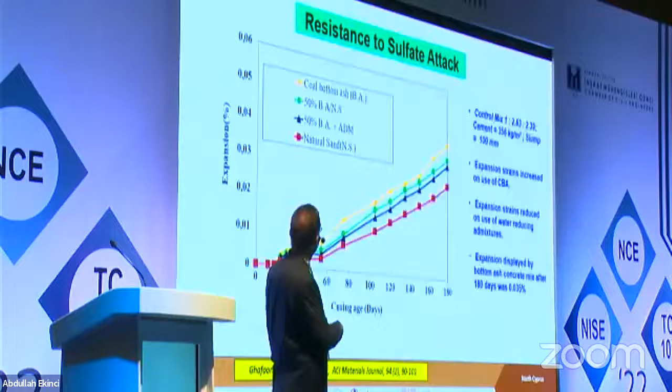We have three types of solid waste: solid waste from home and office, industrial solid waste, and waste from mines, agriculture, and industry. For the people in academics working on solid waste management, they can publish in Construction and Building Materials, Waste Management, and Resources, Conservation and Recycling.

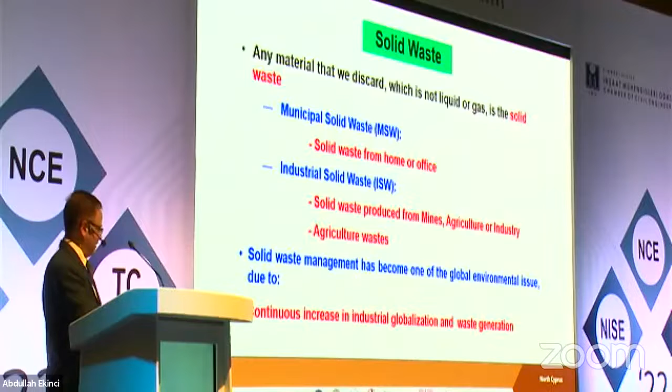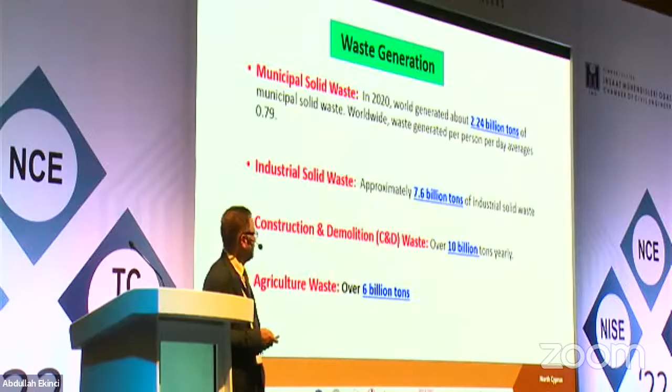Look at the waste generation. In 2020, for example, 2.24 billion tons total, out of which industrial solid waste is about 7.6 billion tons, C&D over 10 billion tons. Even these figures are not really accurate, because some countries really do not know how much C&D waste they have. And agriculture waste over 6 billion tons. So, to summarize, what are the major industrial solid waste byproducts? I'm going to focus on some of them. We have thermal power plants, coal ash, coal bottom ash, etc.

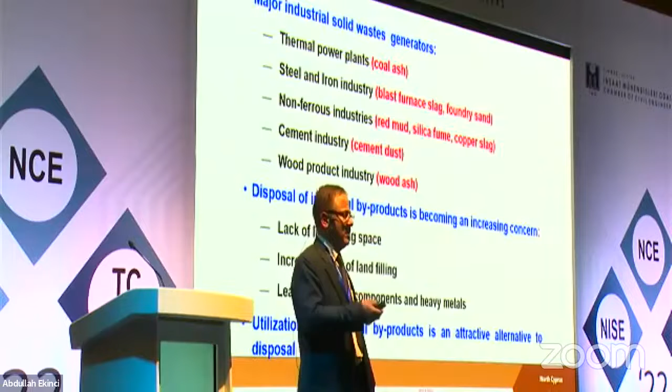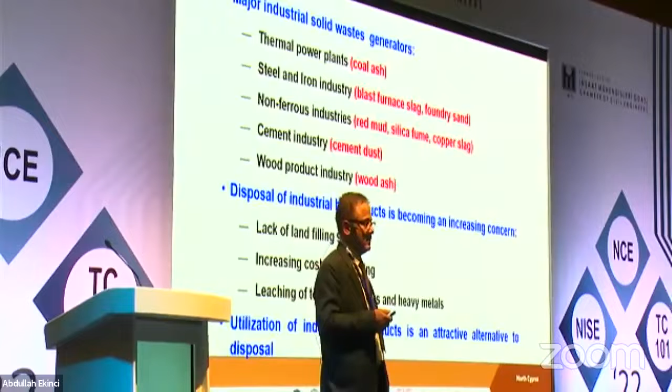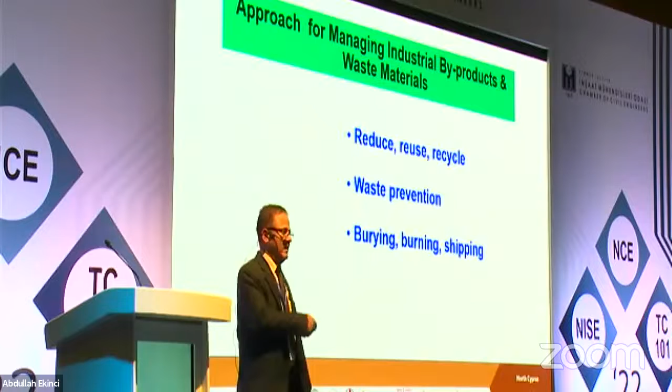So first of all, we want to reduce. We use a lot of plastic bottles, waste glass. So reduce, reuse, recycle; that is the number one best option. Second, waste prevention. And third, burying, burning, and shipping. You must have heard the news: some of this waste from Australia comes and is dumped at the ports of China and India.

Okay. So, the problem is, these are some of the listing of the byproducts you have. I'm not going to speak it. Out of this, some have established research. You know what are the final conclusions. For some, the research is still going on, and for some, the research is still to take place to reach solid conclusions. For example, waste glass. For example, I'm going to cover some of them.

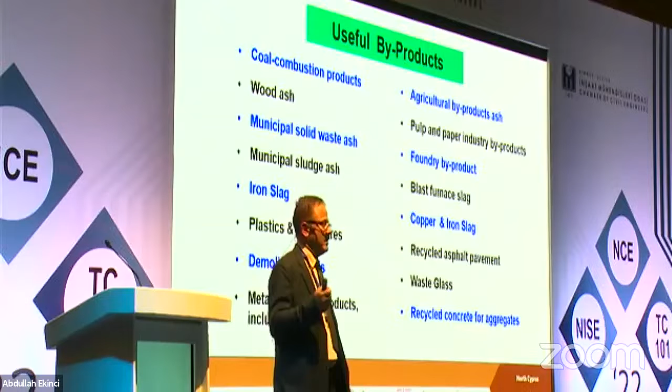The problem which bothers a full-scale utilization of waste glass is its ASR, alkali silica reaction. Once we are able to fully solve it, this is going to be a wonderful material, either a cement replacement or a sand replacement, etc. So out of these, I'm going to cover 2-3 to give you some of the scientific results, and then send a message. What is going to be there?

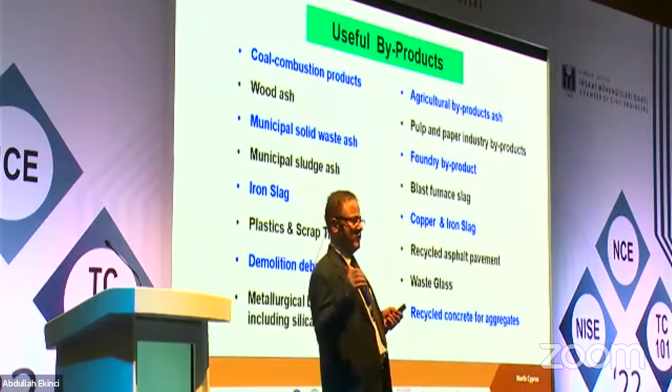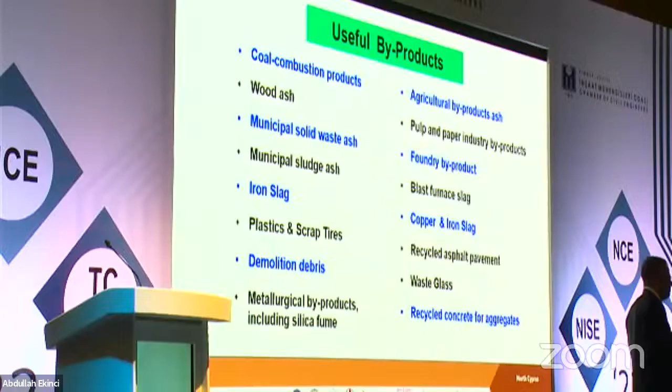And before I do, most of the byproducts I am going to cover are going as a replacement of fine aggregate. My research is spread all over use of any materials as a replacement of cement, fine aggregate, but for the last 10-15 years, the major focus has been on the utilization of byproducts as a sand replacement. The reason why, my argument is, we can produce cement, but we cannot generate or produce fine aggregates.

And most of these industrial byproducts, some of them are listed, can be very effectively used as a fine aggregate replacement. So I'm going to cover 3 here. One is going to be coal bottom ash, the other is going to be foundry sand, and the third is going to be waste glass. And maybe all of you are aware of the research, but I want to give you some idea about what I'm going to talk about.

Say you made a control concrete or the reference concrete, say 50 megapascal, for example. Then we made certain replacement, foundry sand, coal bottom ash, etc. And the value of the compressive strength has come down to say 25 megapascal. We as civil engineers, I do not know the mindset of the people in North Cyprus, but generally, compressive strength is one of the most important properties from which we define the concrete. So people say the strength has decreased by 30%, 40% or increased by this much percentage. So we always talk in terms of percentage.

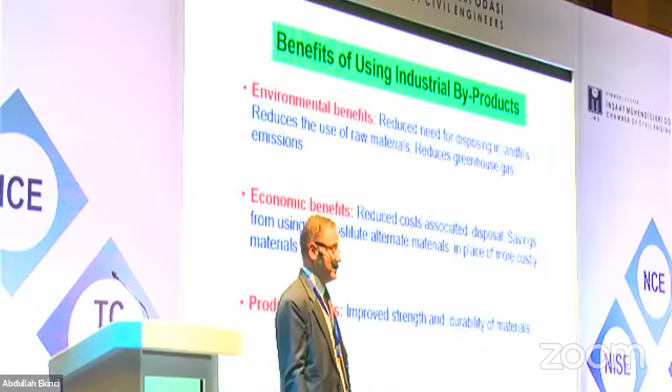So, how do I do? There was an economist, Adam Smith, he said, every process is immortal. It never loses its entirety. And in this kind of research, we are also talking of a kind of circular economy. Even if you have thrown the glass bottle, it's again going to be used. So these are 3-4 benefits. Environmental benefits you have if you use these byproducts, economic benefit, and the product benefit. Economic benefit, you save the cost of fine aggregate or cement depending upon what you use.

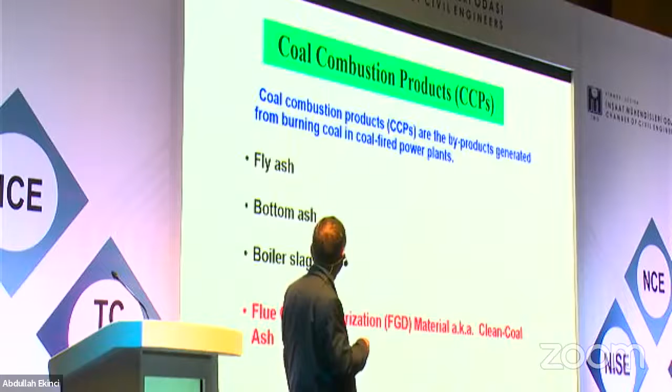So these three I am going to cover, and if the chairman gives me a few more extra minutes, I will be grateful. This is coal combustion, we have three: fly ash, bottom ash, and boiler slag. I am not going to talk about fly ash because every literature is there, maybe thousands of papers. I am going to talk about coal bottom ash.

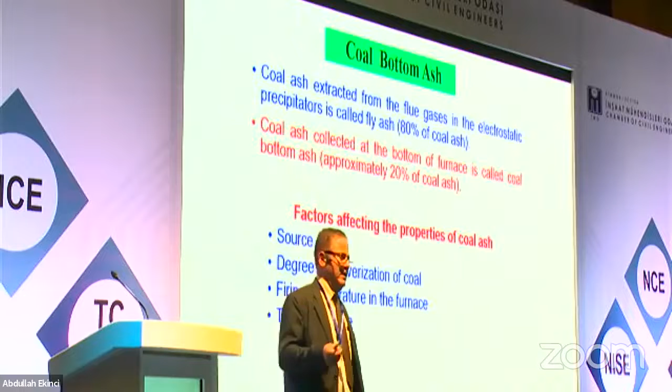By 2030, it is going to be 600 million tons only produced in India, fly ash. If you assume 20%, I'm talking from Indian perspective, and then you can go for a global perspective. Coal bottom ash is generally around 15 to 20%. So 120 million tons of this is going to be used.

So it's difficult to use in concrete. So you need to design a concrete mix. We have two options basically. The point which I want to convey a message as such.

If you simply say it's difficult to use in concrete, so run away from here, let it lie like this, let it spoil the environment, spoil the land, water table, etc. Or work hard to find out its solutions. This is my approach for any of the byproducts. It may be harder, but the time has come, we all must focus on finding out, from the civil engineering point of view, the possible uses. We cannot use all, but we can certainly, and I will show you some results to justify it.

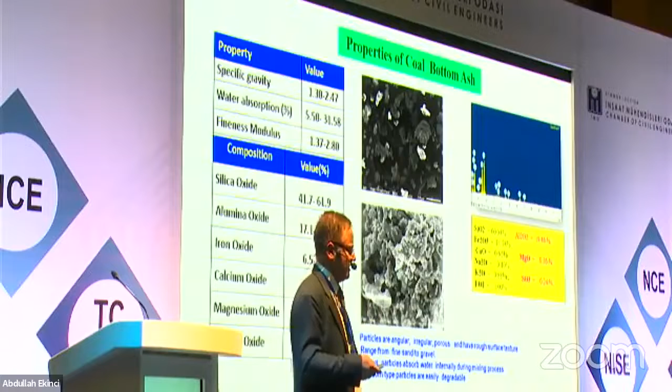I'll come directly to this table you have, like water absorption, calcium oxide values are very erratic because it depends whether you're talking of class C fly ash or class F source, a lot of variations. The particle sizes are crystalline in nature, they are porous, so many people do not try to use it. We started this research almost 8-9 years back, through one of the PhD students.

So these are the irregular particles, so your workability also gets affected. People don't want to touch it as such. But my thing is, any material, you must find out the solution. May not be a structural concrete, maybe a lean concrete or a low-grade concrete.

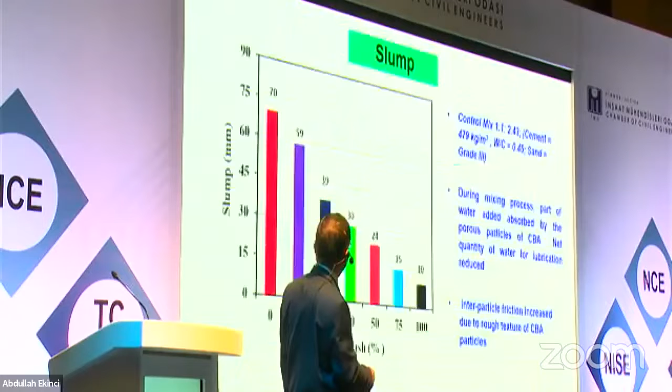Okay, let me come to this. Say, for example, this slump. I told my student, replace all up to 100% finally. Let us see what happens. It's an unknown territory, and this is what is to be done for any material to be used.

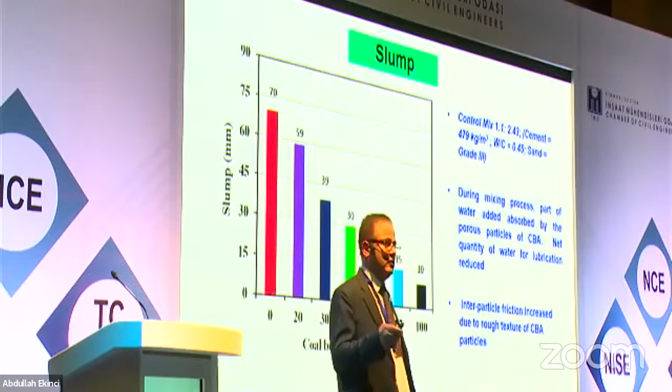Look, see, the slump goes down, you know. So remember this slide. When we talk of concrete research, we should not judge the suitability of concrete only by one of the properties. One of the properties means fresh properties, strength properties, and durability properties. We need to take into account in totality all three parameters.

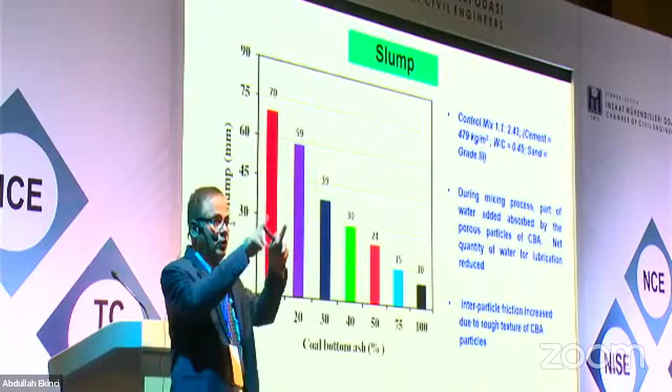Because I'm going to show you a slide of compressive strength. If you only look at the compressive strength, this is Siddique. Okay, this is another, he's a professor in England, some of you must be knowing, very famous researcher. Here you'll find very contrasting research results in coal bottom ash, because the particle is porous, crystalline, hollow, so it depends what type of particle size you have used. But generally the workability is going to decrease.

This is a result I am purposely showing you, that you may also get some type of other results. So generally workability is going to decrease.

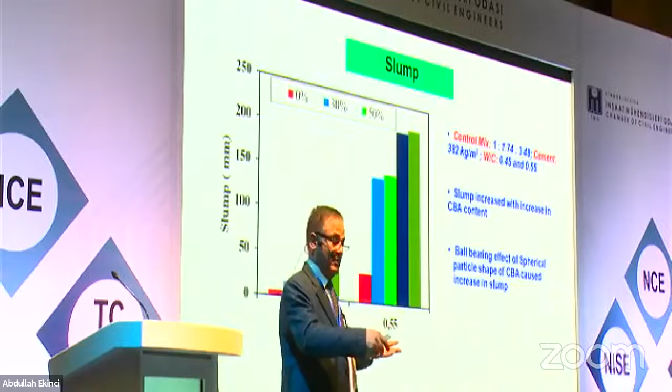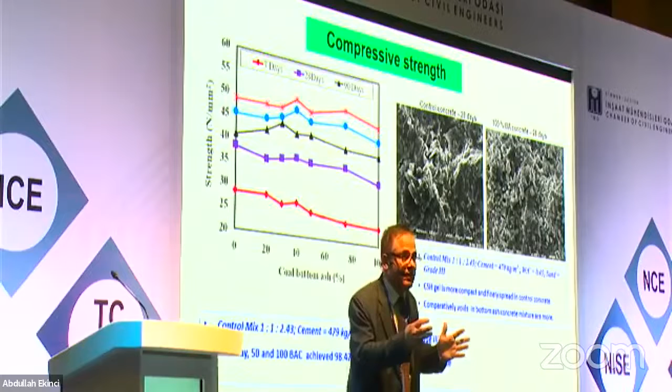But for a structural concrete, you also need to have workability. Please remember, you also need to have workability. This is the point I am trying to highlight. You need to see three properties together. If you only look at this, it is misleading. You need to see what slump, which percentage gives you a workable slump, and you're looking for a structural concrete to pick up that percentage.

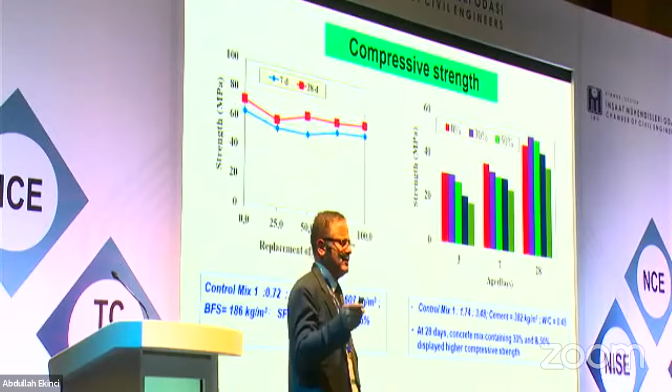Similarly, some of the various other people are trying to find out, and you will see the compressive strength is more or less the same because you're using superplasticizer for compaction, so you're getting the compressive strength. Look at this, almost similar things. This huge number of papers are just trying to put forward a message or idea.

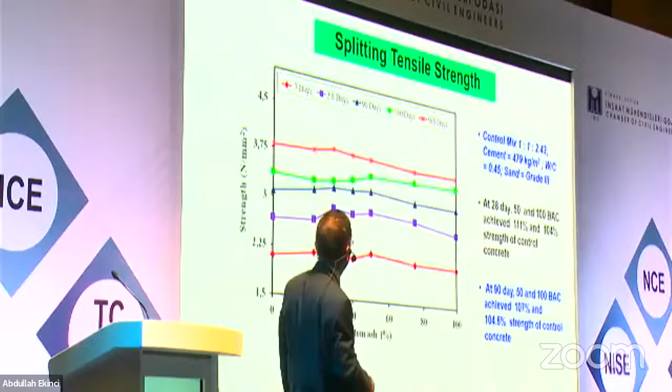Similarly, split tensile strength, one slide I put it. The first author is one of my PhD students, and similarly flexural strength shows almost the same trend, not much of a decrease. I'm coming to the permeability test.

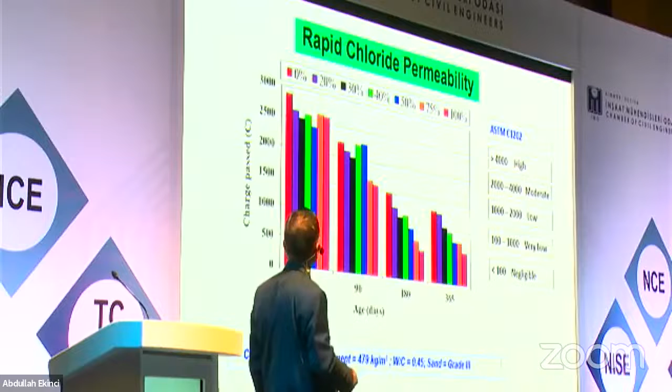When we try to use these byproducts in concrete, my point is, even if it doesn't increase any of the parameters, and just keeps the concrete at the same level, or even if there's a little bit of 5% decrease, still I will have to use it.

Because of the kind of money you save as a cost of price of cement and price of fine aggregate. Second, the amount of money you save in landfilling costs. And more important, there is no measurement of the amount of money you save from saving the environment.

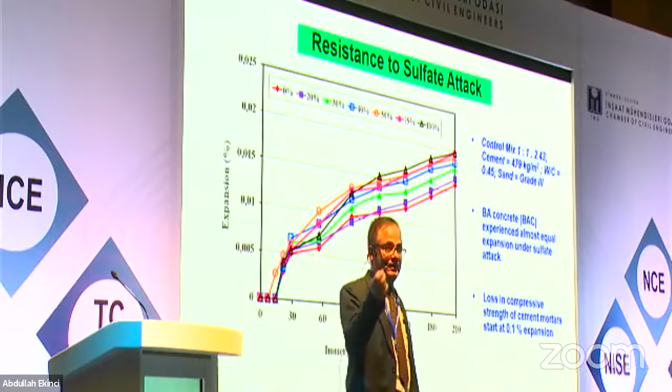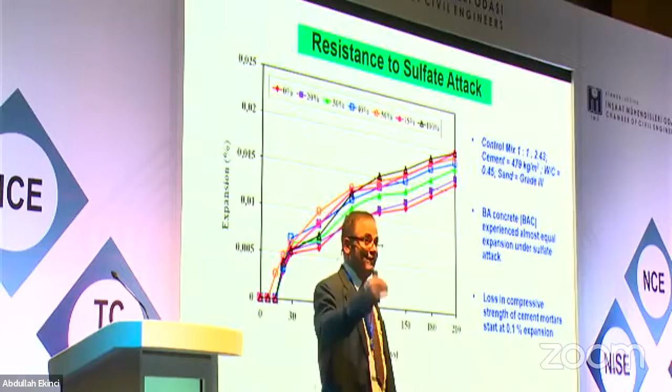So even so, most of these byproducts do improve the durability, they do improve the compressive strength. So that is a win-win situation. This is a very common question anywhere: what happens if it reduces by 10% or keeps the same level? Even then, we must use it because you are saving on cost otherwise. So these are some of the things.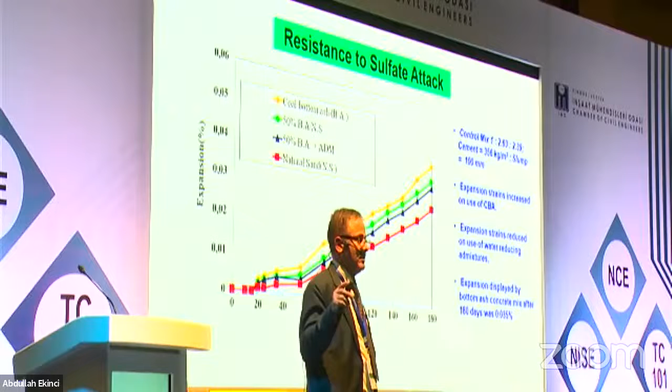He was the first person who published a paper on coal bottom ash, but seeing the issues with workability, he left the research. Then I said we started it so that we need to find out solutions.

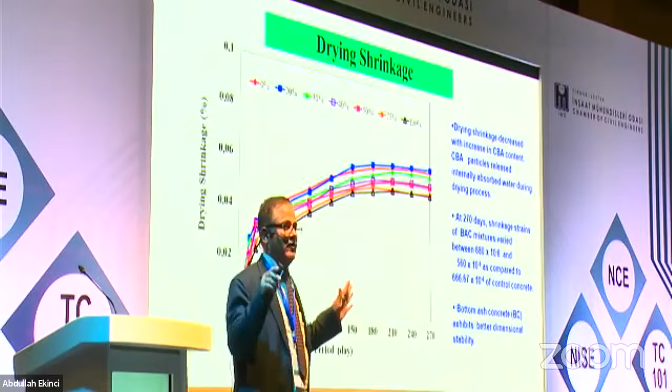See, dry shrinkage, all within the ASTM range, ASTM parameters. So none of the properties are getting adversely affected. That's the point of the message.

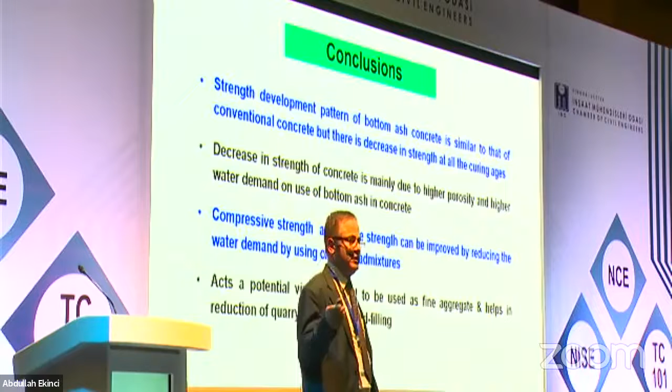And good durability. But if you're looking for a higher percentage use, which you can use in paving blocks, paving stones, or hollow blocks, we can go for a larger replacement as we do not need very good workable concrete.

Second is this, the waste foundry sand. This is a research we started globally in my school, and after that you'll find a number of papers floating around. And then I gave these two names, which are very popular elsewhere: the spent foundry sand and the waste foundry sand. What is this waste foundry sand basically?

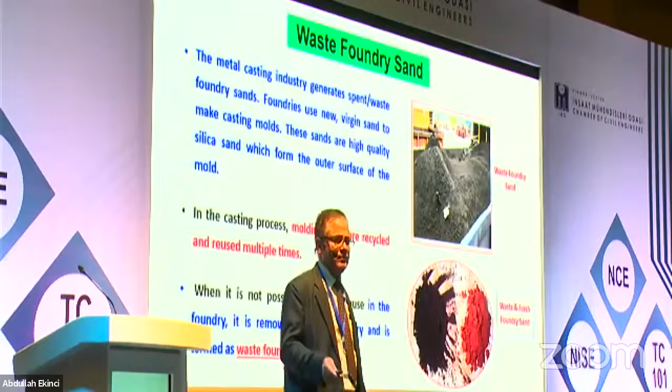This metal casting industry, I'm sure there must be many in North Cyprus and Turkey also. It is made of silica sand, and the molds are made of silica sand, then you add certain chemicals to make the mold. And then the molds are heated up to a high temperature.

And once it is heated many times to make the molds, the sand loses its cohesiveness. And once it loses its cohesiveness, it becomes useless for the industry and they throw it out. And once they throw it out, I first used the name waste foundry sand.

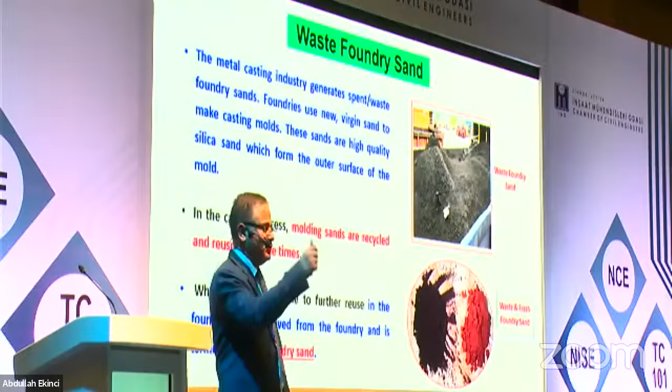But then I started hating the word waste. Something which you are using, you should not call it a waste. So I gave it the other name, spent foundry sand - sand which has already exhausted its utility in the foundry. So these are the two names we gave it.

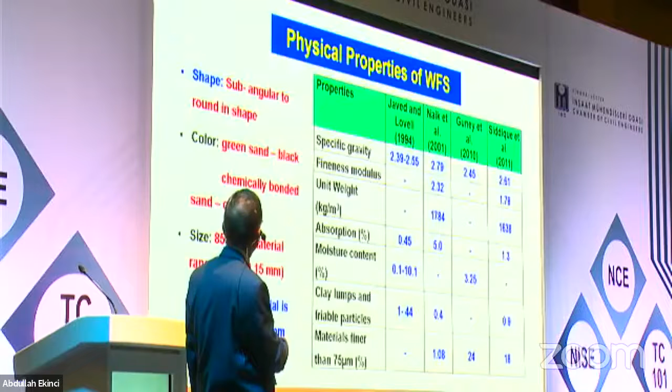Look at the physical properties, they are sub-angular. So when we started this, we found the properties are similar to fine aggregates.

Sand, natural sand is a huge issue in India. I do not know what is the issue in Turkey or other parts of Europe, but that is a big challenge. As I said, cement you can manufacture, sand you cannot manufacture. So look at this part.

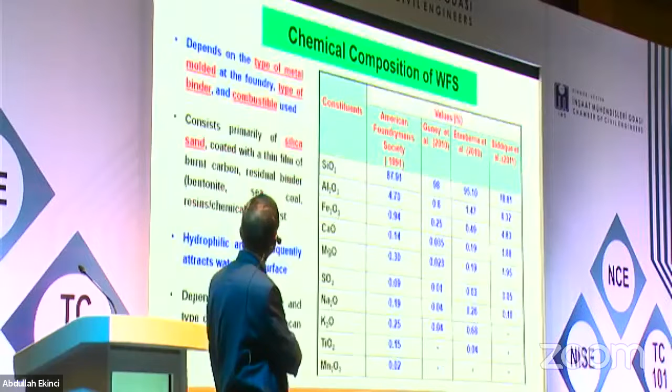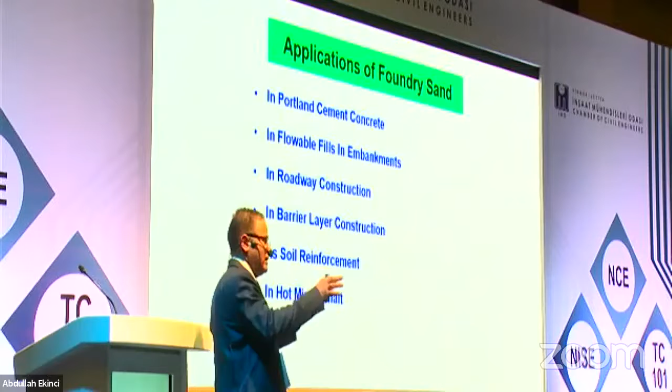These are the chemical composition, very rich in silica. And these are the likely applications. If you put in Google, foundry sand, you will find lakhs of articles on use of foundry sand in CLSM. People in geotechnical engineering may know it. It's called controlled low strength material, which is also called flowable fill.

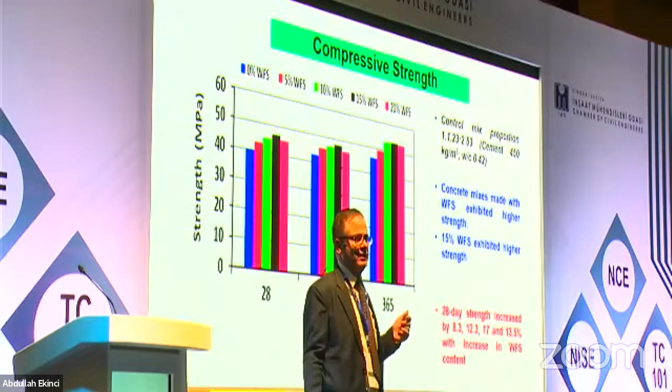Even at 20% it is more than the control. And since the particles are fine, they behave like particle packing behavior. So that is the reason you get these results.

After my research was published, a very good friend of mine, who was professor in Wolverhampton, UK, Jamal Khatib - I think these days he lives in Lebanon - called me and said, I want to replace up to 100%. I said, well, go ahead. Look at this, it's Khatib 2013-14, we worked simultaneously. Look at this graph.

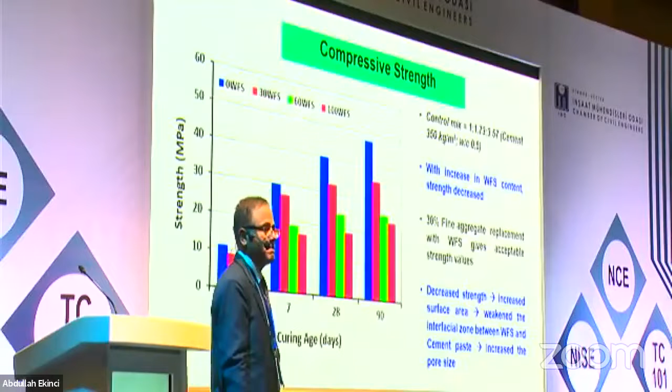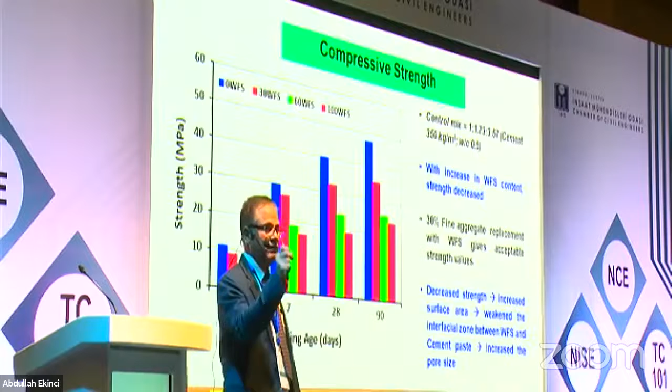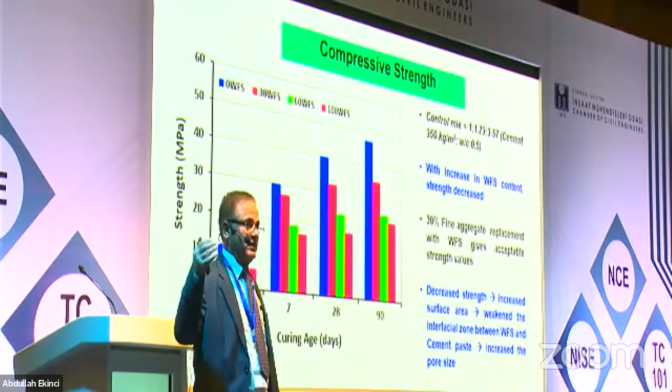Our purpose, at least my purpose, is to find solutions to use in construction materials so that we do not have issues like landfilling etc. Because concrete doesn't mean only structural concrete - concrete means right from 10 megapascals to 200 megapascals. So depending upon things, we try to find out.

See, similarly, I think he is an author from Turkey, I don't know which university. Look at almost the same thing - similar.

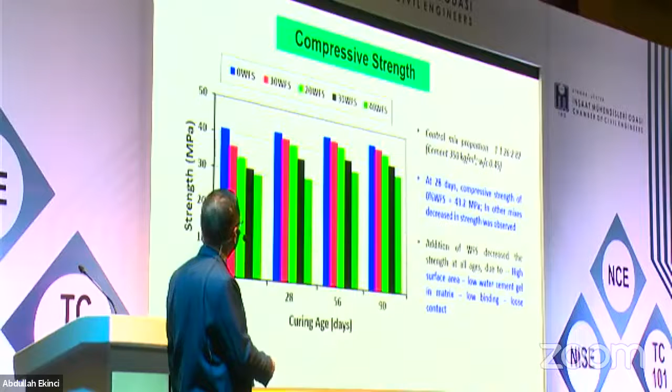Because only with the compressive strength you cannot judge if concrete is good or bad. You need to see the durability. That is very, very important.

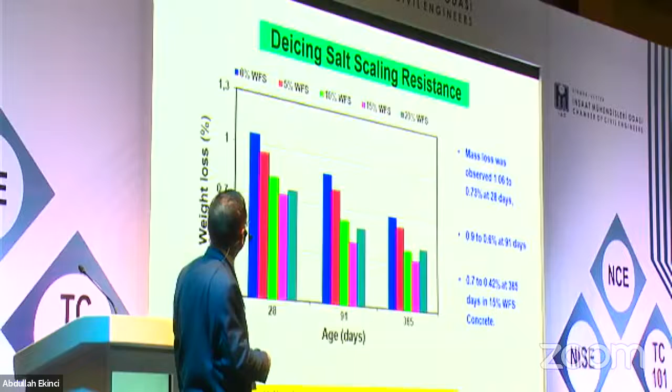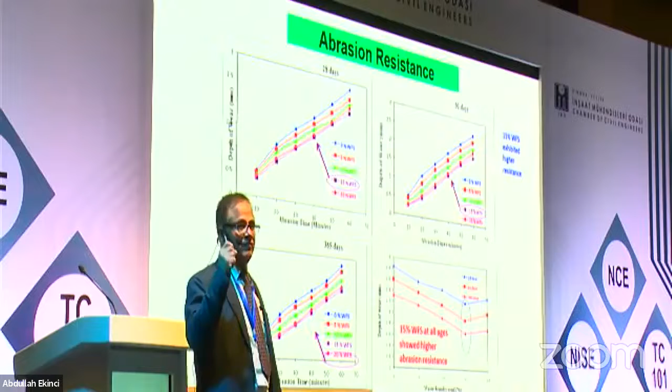Abrasion resistance at like 15-20%. We can see this is also produced in huge quantity globally on this side. And this I can tell with more authority and confidence - this is a better material than coal bottom ash for use in concrete, because this is not a hollow material, this is a solid material, and very similar to your natural sand or river sand.

What do you call it in North Cyprus? River sand, natural sand, or fine aggregate, whatever you call it.

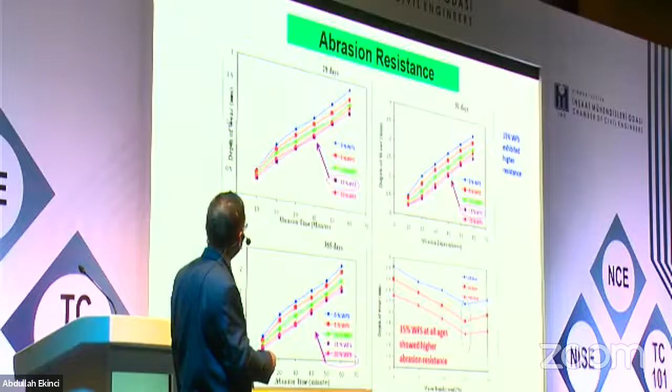I have not included this, but I will give you an idea - those who may be interested can contact me. After this, when you start a discussion, at some point of time you come to a stage where you just don't believe in only publishing.

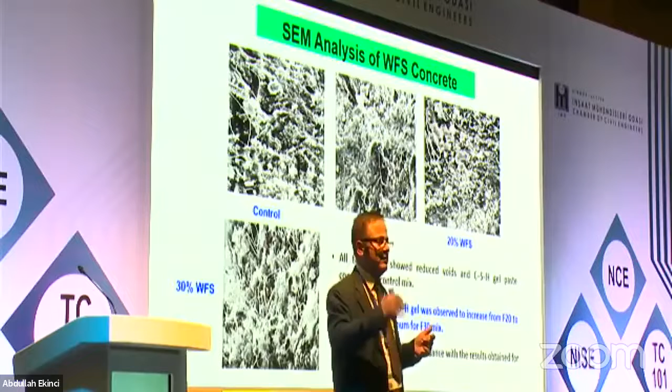If you talk in Europe, particularly Germany and the US - I'm not sure about Turkey or Cyprus - whenever you want to justify to their agencies in Germany or France, they want to find out the leachate analysis, how it is going to affect the soil, if you're using, say, MSW, foundry sand, coal ash or any such material. So they want to do the leachate analysis.

We have done it, not included in this part, in association with a professor in microbiology at my school. We have done treated foundry sand with microbes, fungus, bacteria to improve the leachate quality. As such, this material is not dangerous - you do not need to do those researches.

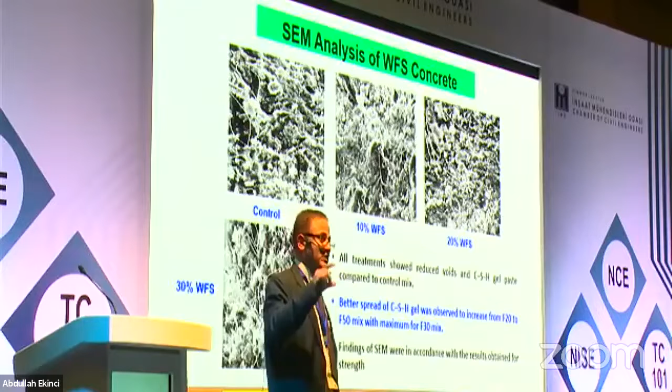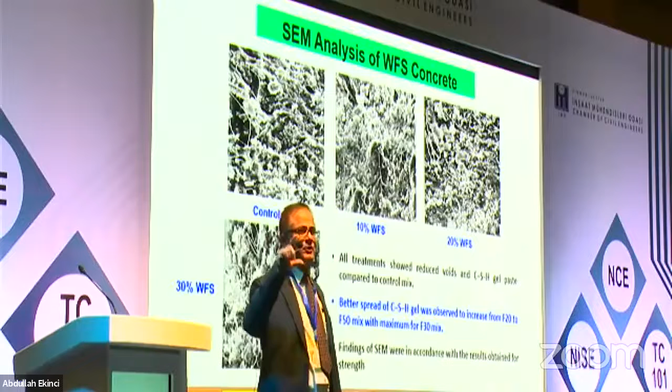It's a very, very safe material as such. But if you go for the use of hospital waste, for example, or municipal solid waste, if you really want to publish papers in good journals, you must include these tests. Otherwise, everybody does fresh properties, everybody does strength properties, everybody does durability properties. So what is new in your research? If you do this leachate part, your publication will have a better value.

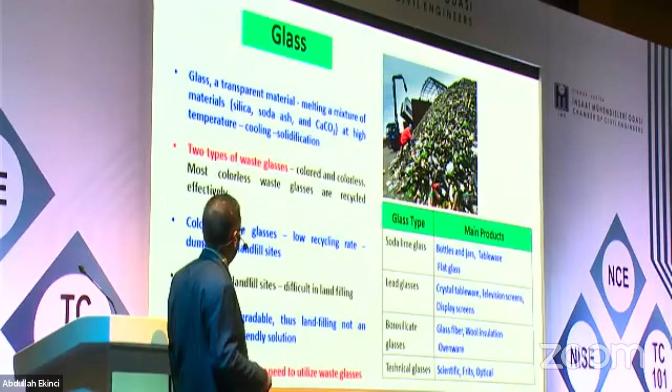So similar to the conclusions here, easily you can use 15 to 30% in structural concrete. If you want to use higher than that, the Jamal Khatib reference is more than enough. Now coming to this waste glass, again you know how much is generated. Just have a look at this. Different types of glasses you have, and this quantity is increasing exponentially every year.

And we simply cannot say we have an ASR problem. The ASR problem is solved to a large extent with the use of metakaolin and silica fume, etc. But look at the quantity. Worldwide is how much? 130 million metric tons. Like India, that much, whatever data I could get. But this is huge. Look at that.

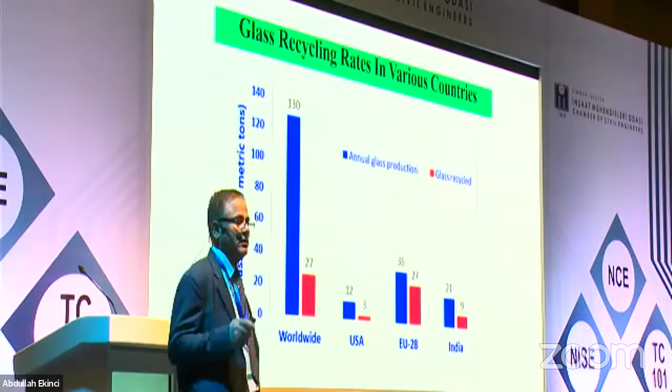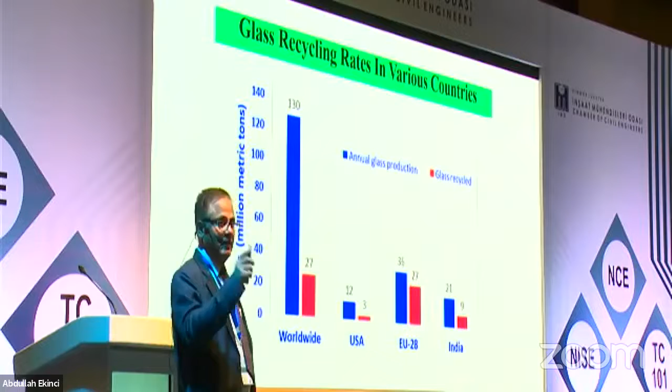Recycling, nothing. We have to find its usage, and this can be a wonderful material, I'm telling you, for cement replacement and as a fine aggregate replacement. But with a caution: you need to be careful in grinding to the proper size. If it is irregular size, instead of helping, you may not achieve good strength for a structural concrete. Otherwise, for lower grade concrete, there is no problem.

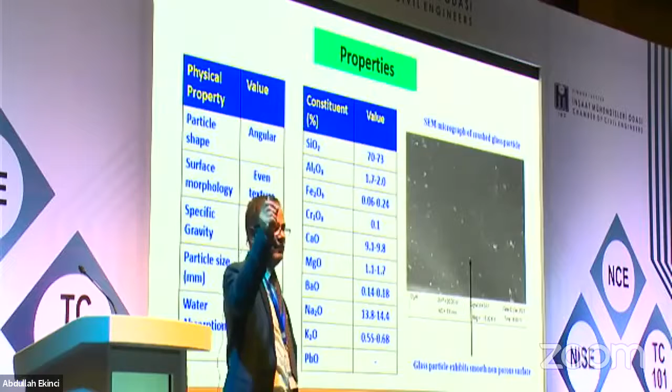So this is its particle shape and particle size, for the benefit of the audience. It is high in silica, but it has calcium oxide, silicon oxide, ferric oxide. To be very honest, once the ASR problem is fully solved, it could be a wonderful material to be used along with silica fume and fly ash for high performance concrete, because it has a decent amount of calcium oxide, aluminum oxide, etc.

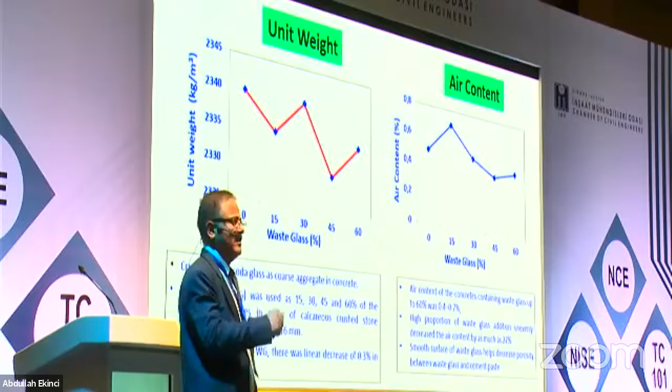So these are uses of waste glass. And look at how, I think the first author is from Turkey, how the unit weight varies, and air content. There's a very marginal change in the air content, if you look at the axis rating. But again, don't take it as the Bible, that this is the only research available for the unit weight. There's a lot, but it gives you an idea of how to go about it.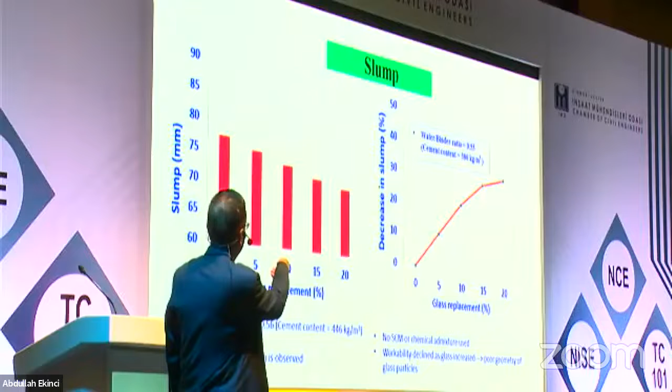Slump, look at the slump, not a problem. At 20% replacement, a decrease, but not a substantial decrease. To be very frank, I'm not concerned if a property decreases, as a civil engineer working on concrete materials. I will use it in another type of concrete. The objective is to find out its usage basically.

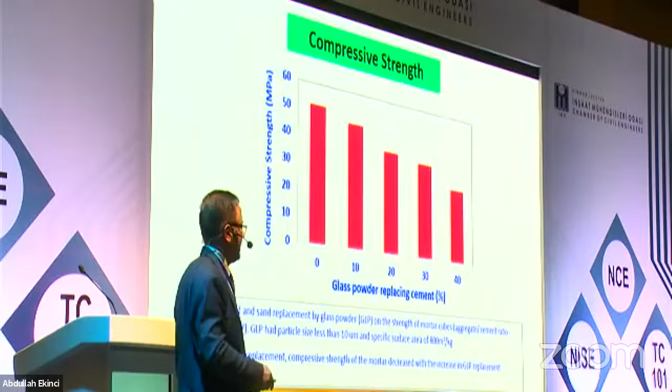But again, this research alone can be misleading. You need to see durability properties, particularly ASR, along with the workability. But look at this. Similarly, split tensile strength results are more or less similar. And then flexural.

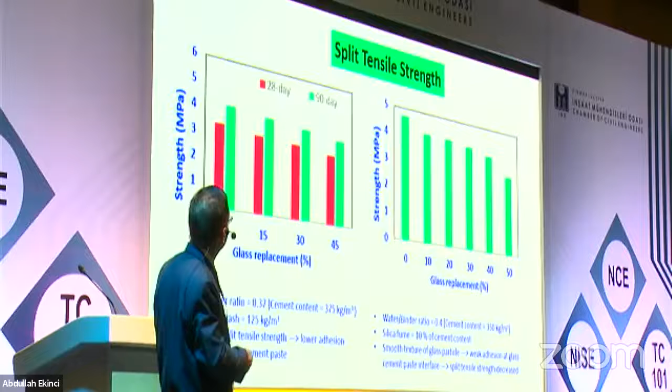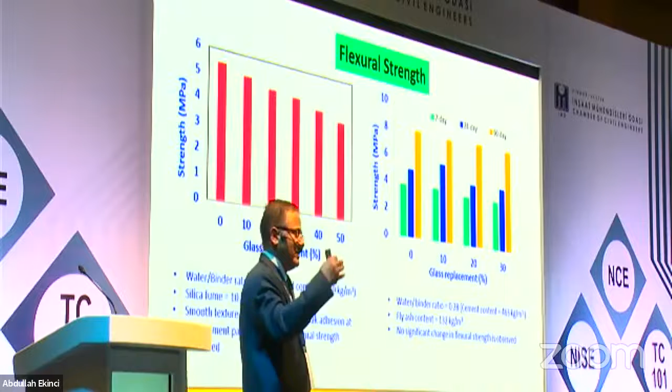If you look at these flexural strengths, the strength achievement is consistent, not much decreased compared with the control, whether research in Korea, Turkey, or Canada. So strength is not an issue with this material. Water absorption, look, it even decreases, which is good in a way. This is Song et al. from Korea, Lee from Korea.

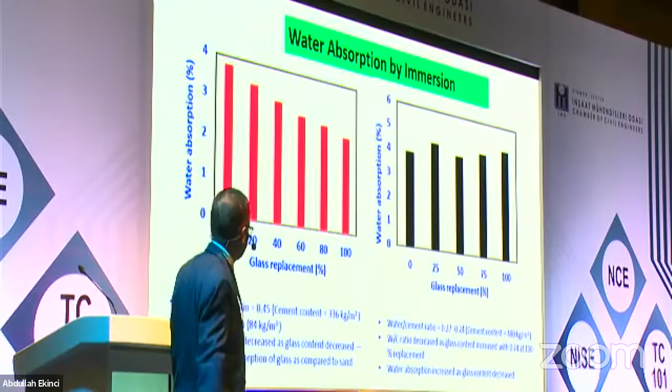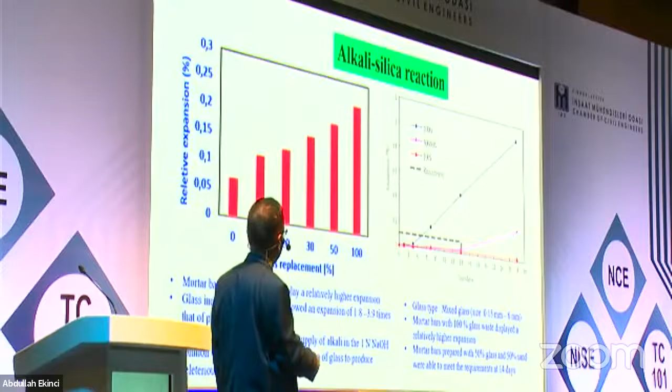Alkali-silica reaction. This is the thing. If we find the solution, and we have a solution, then this is a wonderful material for concrete, as fine aggregate or cement, whatever you want to use. Look at this. Relative expansion. See here, the permissible is 0.1, and for 100% you got this much.

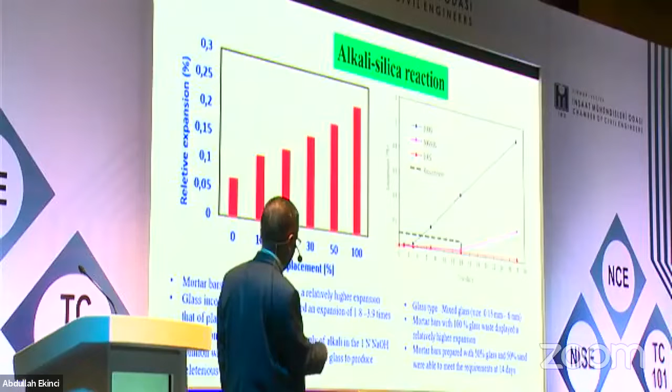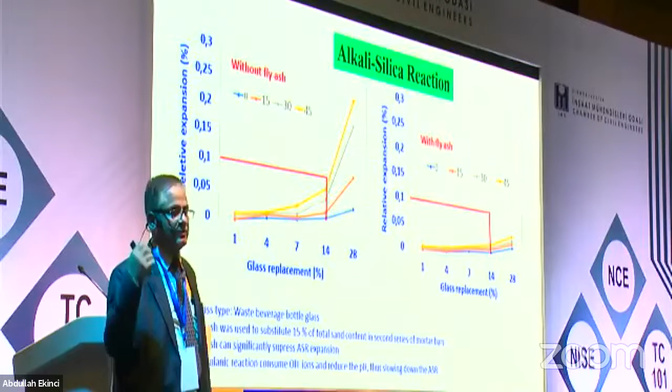The latest research published in 2020. Look at this. With only 5% metakaolin, all concretes, right from 0% glass to 50% glass, are almost within the range of 0.1% expansion.

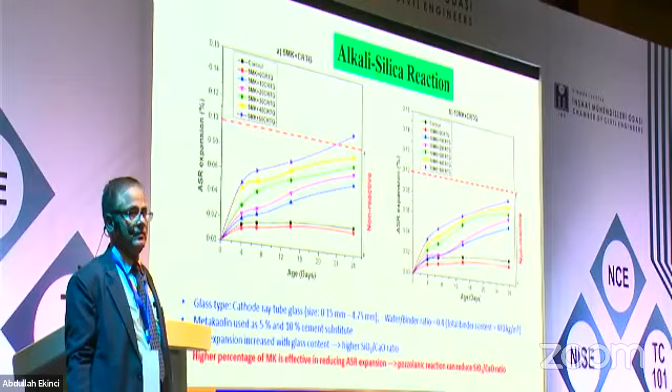And anyway, when we talk of high performance concrete design, as far as my knowledge goes, you cannot produce high performance concrete without supplementary cementing materials. And not only one, it has to be in combination. Silica fume alone is not sufficient, it has to be GGBS or rice husk ash and metakaolin.

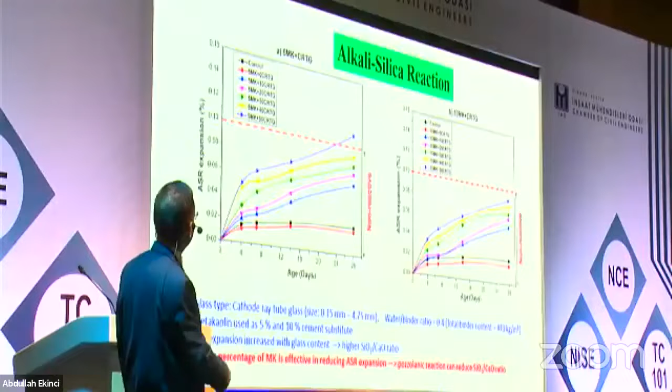So even this glass can be a wonderful material once you are able to, and the result shows. Look at the other result also. Same, it is below. Similarly, these are the green and brown glass. So thank you, and with this I wanted to repeat the two or three points again:

finding out the solution. And if you are the one who is starting, I remember when I first took up research on waste foundry sand, I used to get jokes from my own school: are you going to mix the chicken curry something with it? So when you do something new, there's going to be resistance. People are not going to accept it easily, let me tell you.

But once it is accepted, I am giving you some secrets of publication, your paper is going to be cited very, very well, because you are going to be first. Like most papers published on foundry sand have my references. Initially, there was a lot of resistance. What is this material all about? Say glass also. Similarly, waste plastic, because in 40-45 minutes I said I cannot cover it.

But again, the next important topic is waste plastic and scrap tire. The only issue for structural concrete is the bond between the concrete and the plastic. We have some solutions, but it's not that we can blindly use them in structural concrete. And we have to find a solution if we want to save our environment, reduce landfilling, and reduce the cost of your concrete. Thank you.